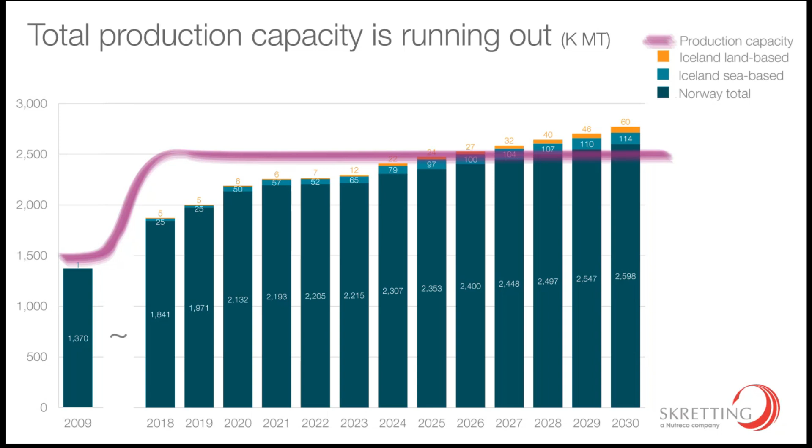So one thing is we need to secure production capacity, but we also need to secure raw materials. Where are we going to get these raw materials from? If Icelandic aquaculture is going to grow, what are you going to feed the fish with?

As a company, we are this year 125 years old, and we would like to see our company survive the next 100 years. But we'd also like to see our suppliers and our customers become such an old company too. For us, sustainability means securing the things we have scarcity of, also in the future, so that we can continue to have them.

A thing we are really occupied with is marine resources. First of all, that's the best raw material that we have. Making fish feed could be quite simple - take white fish, just blend it, off you go.

But what we saw was that in the 1990s, when aquaculture in Norway started, the recipe we had mostly used wild fish - blue is wild fish. If we had to use the same recipe today, there wouldn't have been enough wild fish in the oceans to cover it. That's how much food we create.

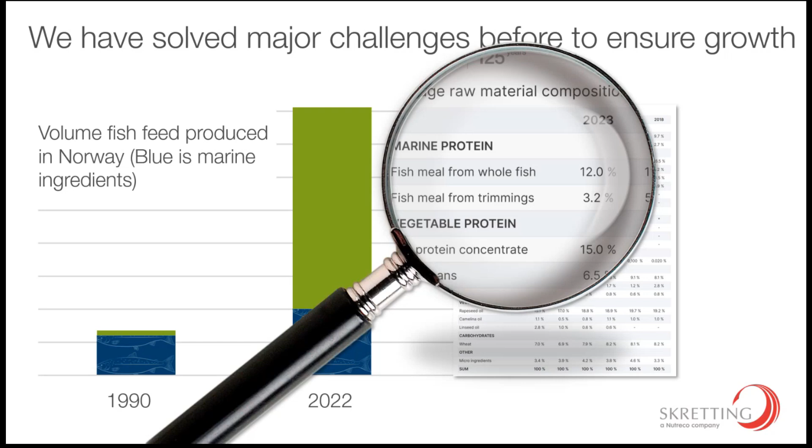When you look at it now, this is the amount of fish meal in our feed today: 12% from whole fish is fish meal, and half of that is blue whiting. We are willing to walk away if Norway, Iceland, Faroe Islands, the UK and EU cannot agree on this. And why is it so important?

Just take a look at what we can do with fish oil.

But the problem is wherever you go in Europe, if they're talking about overfishing, salmon is to be blamed. We have become the poster boy for overfishing—doesn't matter if it's true or not. Take a look at the German newspaper Spiegel: it says Chinese trawlers are fishing the coast of Africa empty for our Norwegian salmon.

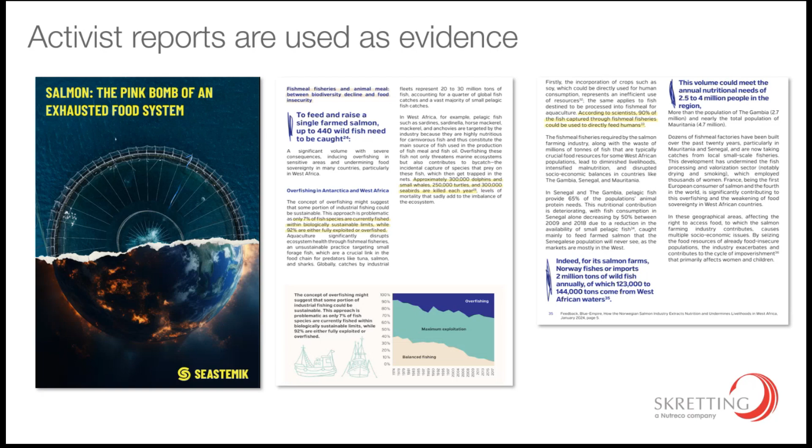And this was just last week. So this is the constant battle we are in, with consumers in Europe seeing this and thinking: will we eat salmon or not? Are we then contributing to overfishing of the oceans, the destruction of our ocean? That's the idea that consumers out there have.

Just quickly—a year ago, The Guardian reported one of the top chefs in London was not going to serve farmed salmon anymore. Why? Because we supposedly use so much antibiotics. We don't use antibiotics nearly as much as claimed. And also, overfishing, that's why. So you see these rumors, these myths, keep spreading.

And it carries on—New York Times, same thing, don't do it. Monterey Bay Aquarium, which isn't only an aquarium but the number one source in America for what kind of healthy seafood you can eat or not, says do not eat Norwegian salmon unless it's been certified.

This is also interesting: in Sweden, we've been accused of fishing the Baltic Sea empty of herring. They have this dish, surströmming—I'm not sure if you've eaten it, don't do it—but they don't have enough herring to sustain it, and we are being blamed that we are the ones doing it.

So restaurants in Stockholm have people going around handing out leaflets saying Norwegian salmon is ruining our traditional food. I think 1%—sorry, of all the herring fishery in the Baltic Sea, we used only 1% of it. But we are being blamed for it. That's why we only buy certified fish oil and fish meal.

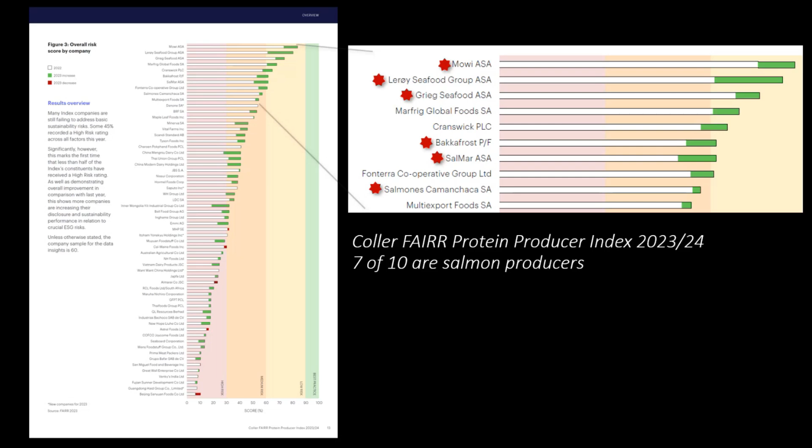Take a look at who's on top - it's North Atlantic salmon companies. And they would like to stay there. They're really proud of this. This is one of the main selling points. And it's not only greenhouse gas emissions, it's all these different areas where you have to score really, really high. Number 2 is biodiversity - again, are we sourcing in a way that we don't ruin nature? And why is this so important?

Well, is it the economy, stupid? It's the economy for the salmon companies. These words were Bill Clinton's, that's why I mention him here. But why is it so important? Green financing - you can get cheaper finance if you can show the financial institutes and banks that you are working in a good way on sustainability.

Mowi, the world's largest producer of salmon, says that within the next year, all their funding will be green. So they have to choose it. And DNB, the Norwegian bank, which is the biggest investment bank for salmon in the world, they are also really into this, and they will give you better financial terms if you can prove it.

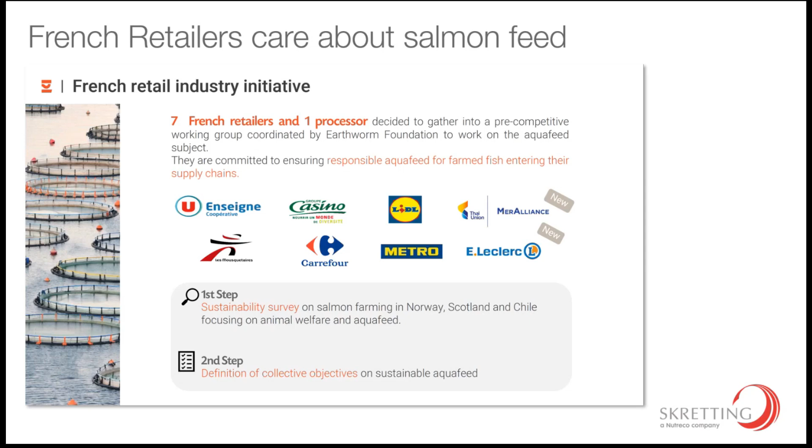Take a look at this - French retailers, the largest supermarkets in France, went together with an NGO and asked what should salmon feed be like. What they ended up with was: decrease use of fish meal and fish oil, use less, or at least make it sustainable. That's the push all over the place that we see.

So they're talking about this, and you have the EU taxonomy, which is the rules for how a European company can say they're green - what are the rules? There's one specific rule that relates to protection of water. That means a German concrete producer has to prove that company doesn't do any harm to the oceans. That's how important it is now for consumers all over Europe to protect the oceans.

In Norway, you don't find that demand for certifications. I talked to one of the buyers from one of the really large retailers in Norway, and he said we don't want our products to be labeled certified because it increases cost, and we don't need it because in Norway we trust the government to manage the oceans well. There's no need for it - we know that we do that.

Yeah, but what happens when word comes out about how we are doing with the coastal state negotiations on mackerel, herring, and blue whiting? Will the people of Norway still trust our government that we are doing well in managing it? So we are losing credibility here.

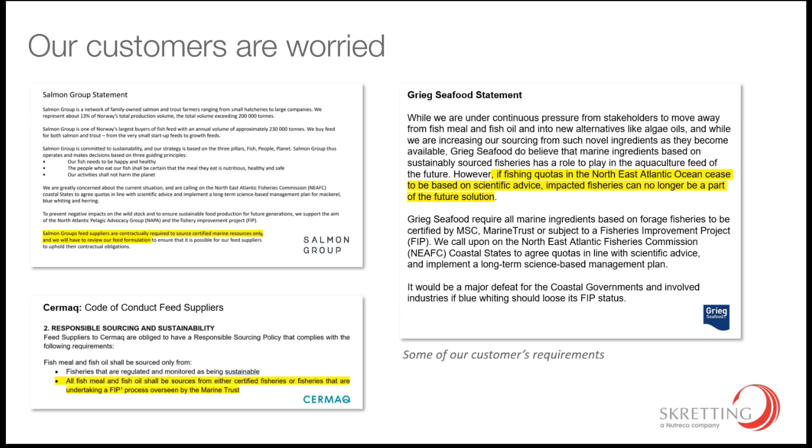So it is kind of critical now that we can prove that, no, this is the best raw material. You can trust us. We will do it in a sustainable way, and we will make sure that we are still going to be the best managers of the world.

But these things, the coastal states agreements - I'm not sure if you know this, but everyone agrees on the total quota of blue whiting, herring and mackerel. There might be disagreements, but at least we agree on it. Then everybody goes home and says, I'm going to need this much fish, I'm going to need that much fish, and they all overfish. We haven't seen a total agreement for lots and lots of years.

And this month, the fishery improvement project we had for blue whiting, which made it possible for us to buy it, ended. In the final hour, this fishery improvement project was extended by 2 more years. Marine Trust said, okay, we see now the awesome push, the market is pushing, we're going to give you 2 years. Because this is a political problem. It has to be solved with politics. The market cannot solve it, but we can push it.

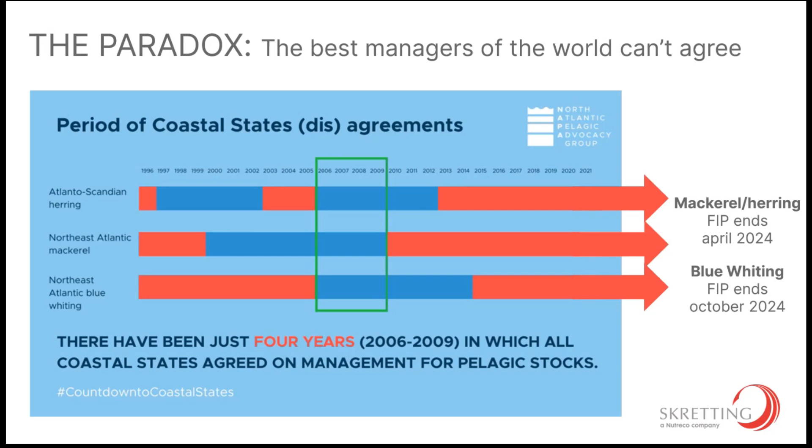I mean, the politicians are supposed to do what we want them to, right? We are the people here, and we are also the market. And the problem is, again, that in 2009 there was an agreement on how to share it, and that was the last time there was an agreement. And this is now how it is.

I know that Norway says we are the good guys because we don't fish more than we did. And the Faroes say we are such a small economy, we need this, that's why we need to fish more. And Iceland has their own arguments. Yes, everybody has excellent arguments. But it never gets solved when you just blame the neighbor and there's no movement in it. And that's where we need to push it.

And this is our Prime Minister. He is the co-chair of the high-level panel for a sustainable ocean economy. He says that Norway is an international leader in ocean management, and we must work together with our partners to translate ambitions into actions. And this is how you do it? I mean, there is so much good stuff, but it doesn't manifest itself in these negotiations.

Just another quick look at Norway. Norway has just started a mission, a society mission, which basically is a huge thing that Norway's society is going to do to create new jobs, new things. And the first mission is about fish feed, actually.

And what they are saying is that they would like to see all raw materials being sustainable, but also increase the production of Norwegian raw materials. Today, only 8% of the stuff we use is from Norway.

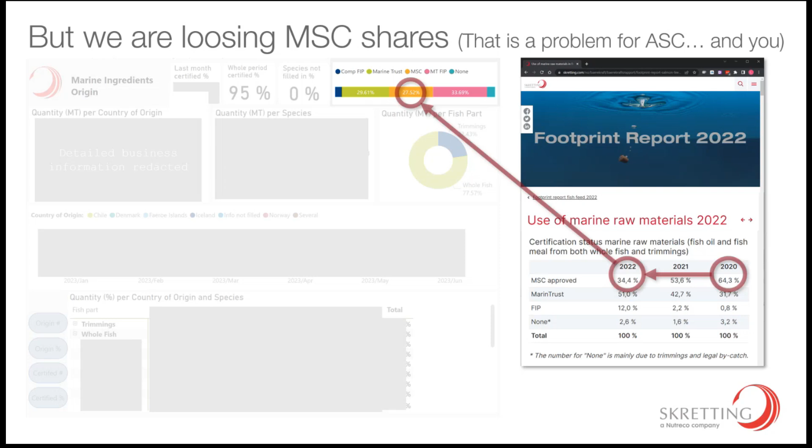But the thing is, there's not a chance you can get certified if you cannot agree with your neighbors on how much fish you can take out of the ocean. When everyone says, I'm going to have my piece of the cake, in the end the cake is not big enough. It is extremely difficult, yes, we know, but I'd like to look at Kennedy.

What they did in the US in the 1960s, he said they're going to put a man on the moon. What a mission. And he said we're not going to do it because it's easy, we're going to do it because it's hard. I think that's the same with the negotiations here. It's extremely hard, but I think we can do it.

We have agreed before, and we as an industry must let our politicians know that this is really important for us, because we would really like to have you as a supplier for us also in the future, because you just have such a fantastic product. So that's why I'm here today, to ask you all for help so that we can get the coastal states to agree.

And just a final thing, I've heard someone say that it's not a problem, because if you overfish one year, then the next year the scientific quotas will be adjusted, and there's so much fish anyway, so what's the problem? That's a completely different question. That's a question of how big the quotas are going to be. What we are talking about here is certified or not. That's black and white, folks.

Either you get the stamp or you don't get the stamp. And our customers need that stamp in order to sell their products. So please go ahead and argue about the quotas and what they're going to be, but at least agree upon the share you're going to take. That's what we need to do. So thanks.

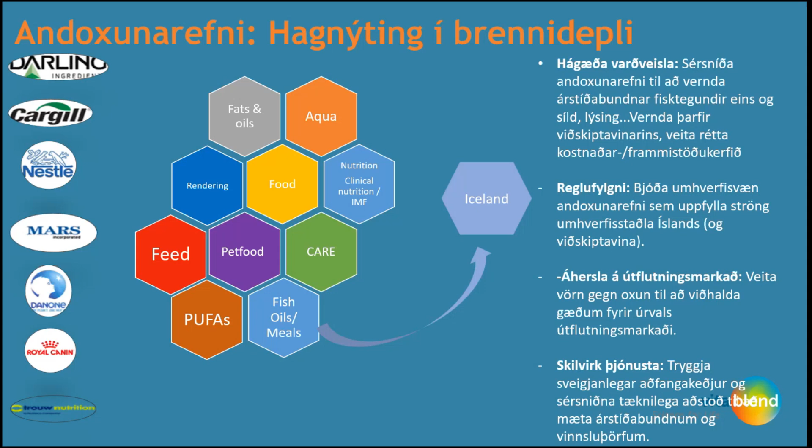Then, if we look at how we work today, this is the DNA and the essence of Vitablend, together with our partner N1. It's all about understanding your needs. So we use different types of active compounds. Most of you know tocopherols, rosemary extract, for instance, which are widely used in the industry today to protect your product.

So our job is to make sure that we understand what you are using, the matrix you are producing, and to provide you, using our laboratory, our technical team, with the right solutions at the right dosage. So we can make tailor-made antioxidants for your need, which suits your need, taking into account your matrix, your process, your targets, and of course, the regulatory environment.

This is what we do at Vitablend, together with our team, to really help you and to discuss with your technical team to find the right product. How do we do that?

Well, we have lots of equipment, lots of tools, and I'm sure some of you are also equipped with that. But this is basically the essence of what we do today. We talk about performance screening. And the devil is in the details.

Sometimes, again, as I said before, you might think, well, do I really need antioxidant? Or is the dosage I am applying in my process the right one? Because at the end of the day, for you, it's a cost.

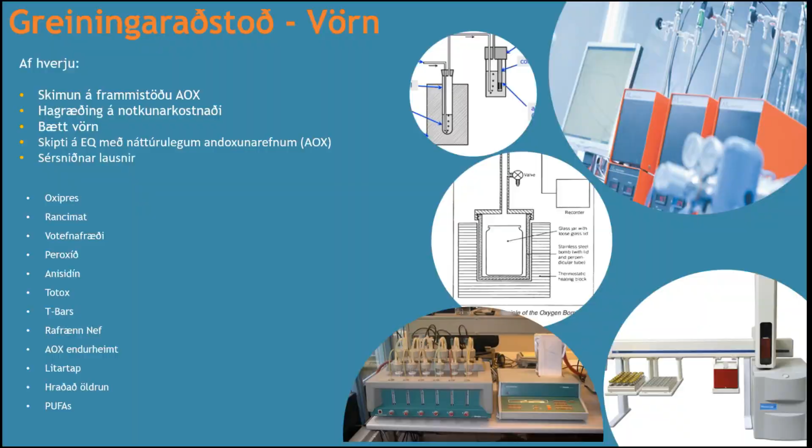So then you will need to adapt the solution and the antioxidants you are using. We took a couple of examples of matrices we've analyzed with different types of antioxidants Vitablend is producing, using different techniques, so it's based on science. We have a protocol, we set up the test and equipment, and then we get results on stability between the different antioxidants.

So it's very simple on paper, but again, experimentation - it's all about science. Comparing all these different formulations, in that case Atlantic herring, using natural or synthetic. You see that we have some nice solutions today to really maintain the quality and stability.

You see that we have some nice natural solutions based on rosemary extract, tocopherol, for instance. Also the more traditional antioxidants based on BHA, propionate, or citric acid, which might change in the future because there are lots of challenges today. BHA might be banned in the future, something we are monitoring very closely.

But you see here how we can deeply analyze the performance of different antioxidants in your product. That's something we can really do specifically for you, on your fish meal or oil you are producing. We've done this with the Atlantic herring example, or with another one, the blue whiting.

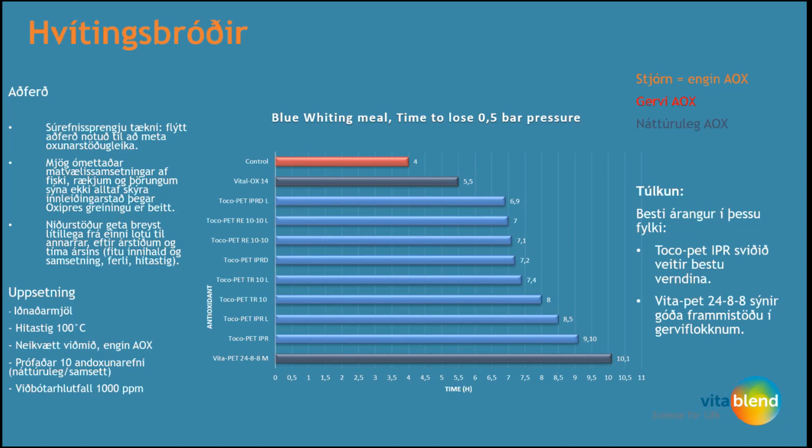So you see good performance of our Toco-PET IPR, for instance, which is based on tocopherol, rosemary extract, and lecithin, and different types of performance of the Toco-PET RE 10-10, which has another ratio of active compounds. This means that the different solutions will also perform differently in different types of matrix.

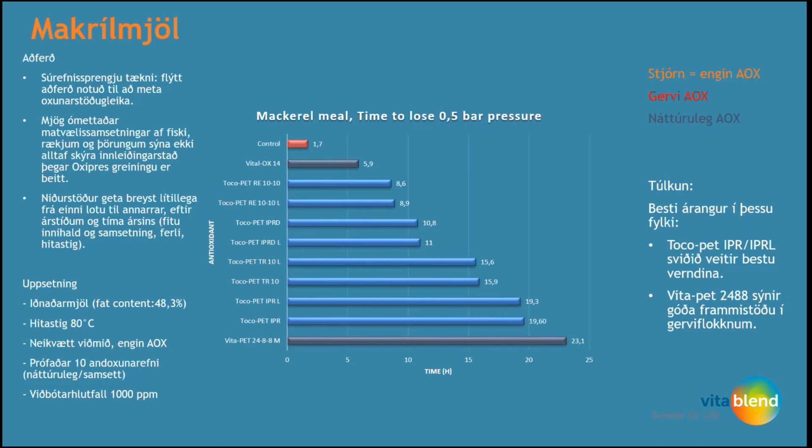That's very important to really focus on that. Depending on what you produce, you will need certainly another type of antioxidant at a different dosage. So if we summarize what we do today, and that's very important...

So it's all about understanding what you need. After 10 years being on supplying you together with our partner N1, we've been able to select some nice antioxidant systems, like the Toco-PET family, for instance, or the TR10. They have been proven very efficient.

But nothing is really set in stone. Things are changing, and the profile of the fish you are fishing will change, the fat profile. So we will always need to monitor the performance of the antioxidant over time, also depending on what you are doing. That's something we want to pursue and develop with you — assessing, testing, monitoring, optimizing the functionality and the cost of the protection. That's something we want to do, and we want to keep doing it in Iceland with you.

The solution you need, we have it. It's just a matter of identifying exactly how to achieve that and how to test it and how to select it. What is also important — you might think, okay, that's great VitaBlend, but you do the test. Well, we can also do tests outside of VitaBlend using external laboratories. Then you are sure that the tests are neutral, and that's also important in some cases. We can do blind tests to compare VitaBlend with any other type of antioxidant system to make sure you are convinced about the performance of our product and our systems.

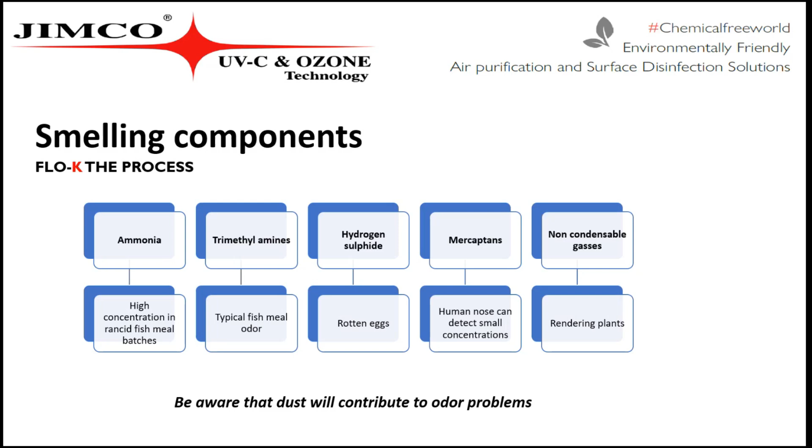Amines, they smell bad, very bad, much worse than hydrogen sulfide actually. Amines come from fish meal, fish oil, fish production. That is a really bad one, and the non-condensable gases too.

Now, the solutions for your productions - it is not really a chimney, because a chimney is just a dilution. And in America, they say dilution is the solution, but we don't do that. We need to do something about it. We need to destruct our odors, and a bio or chemical scrubber could be one of the solutions. It's not the best solution, I have to say that.

You will see when you start it up, you have fresh water in the system, you can have up to 50% of reduction, but after maybe 1 or 2 weeks, it is reduced to 30% or less. The water will start to have smell, to have odors inside. Now you are adding odor into your exhaust there. That's not good. Then we have biofilter.

Biofilter is pretty good functioning if you feed it well. It's also not really a very big investment, unless the ground that you are using is very valuable, because it takes a lot of space. So if you are in a crowded area, like now we just had a Dutch guy on the stage - in Holland, they have not much space. In Denmark, we do not have a lot of space. It's not really a good idea to use a biofilter in that situation.

Then we have photooxidation. It is what I'm doing. We are working with photolytic oxidation. I will come back to the efficiency and how and why it is functioning later on.

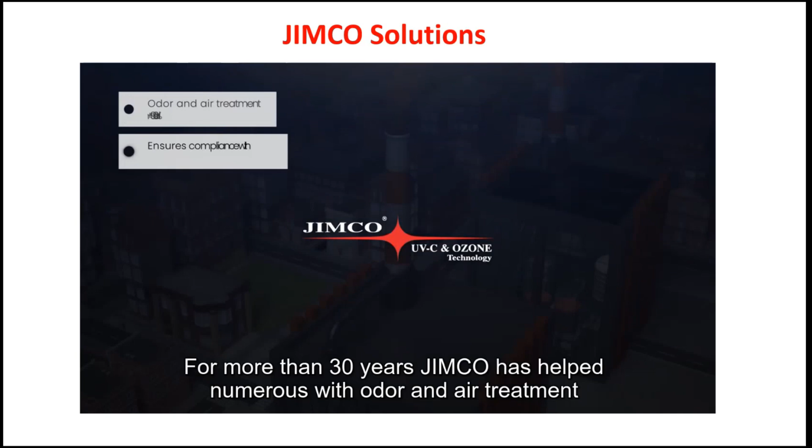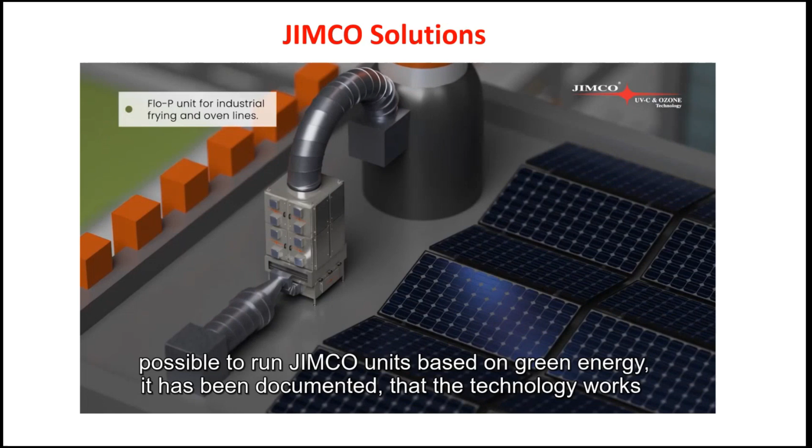For more than 30 years, JIMCO has helped numerous industries with odor and air treatment, with efficient utilization of existing space, custom-made based on requirements. It is even possible to run JIMCO units based on green energy. It has been documented that the technology works, and JIMCO has even won the EU Environmental Award in the Cleaner Technology category. JIMCO's technology is based on photolytic oxidation, which results in cold incineration of all organic material, giving results with up to 99% reduction. The process leaves no harmful residues.

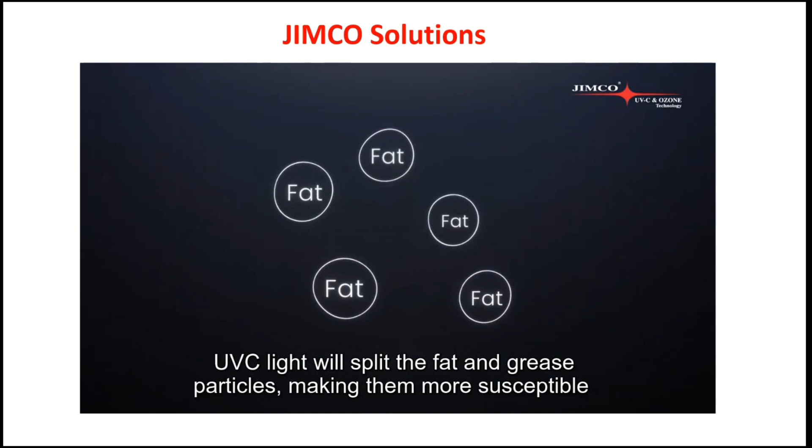UVC light will split the fat and grease particles, which makes them more susceptible to ozone. The ozone will oxidize with the fragmented fat and grease particles. Photolytic oxidation will reduce pollution to the surroundings dramatically.

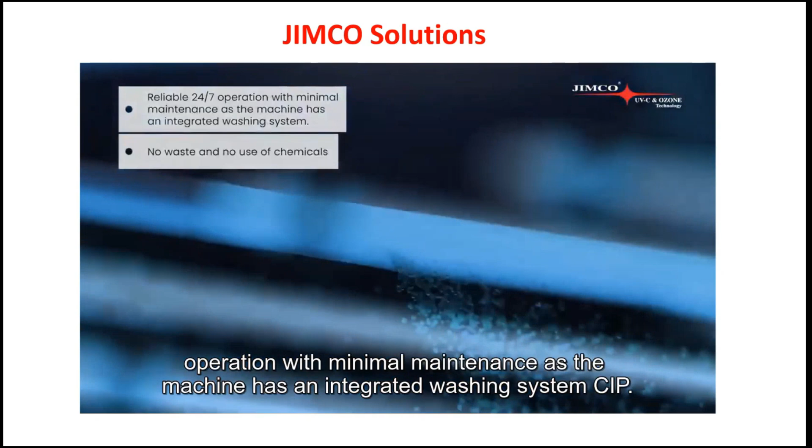Reliable 24/7 operation with minimal maintenance, as the machine has an integrated washing system, CIP. JIMCO's equipment can handle complex airflows from all sectors of the facility. When it comes to residual products, JIMCO is at the forefront of the fight against pollution. Our system ensures that no odors or harmful substances escape.

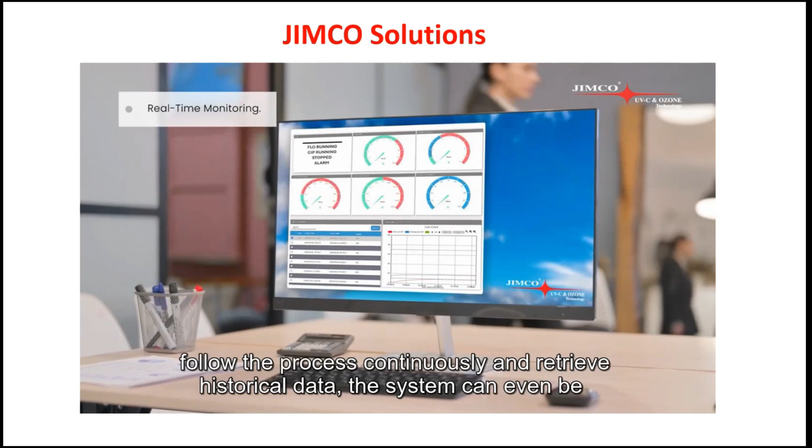With real-time monitoring from a dedicated cloud system, it is possible to follow the process continuously and retrieve historical data. The system can even be remotely monitored from any position worldwide. JIMCO, Sustainable Systems for a clean future.

Now, when we are doing our cloud system, we have had some questions from municipalities and government people. They want to follow the system, how it is running, is it serviced. Why they want that, especially in South America to be honest, is because they have had a lot of trouble with the neighbors or with the society around the factory, and they don't want to start up all that noise again. So they want to have direct access, but naturally it's you as the producer who is giving the access to the people if you want to.

If you are a company who has more companies in one concern, it's important that you can sit in your main office and follow that all your factories are running well, and follow, did they service the unit, did it wash last night, did it do this and that. You can follow everything, data log, and go back in history.

That is very important. Now, the system is very simply said, a cold burning process. What is happening is more or less the same as in a thermal oxidizer. It's just cold - we don't have any fossil things to burn the pollution here.

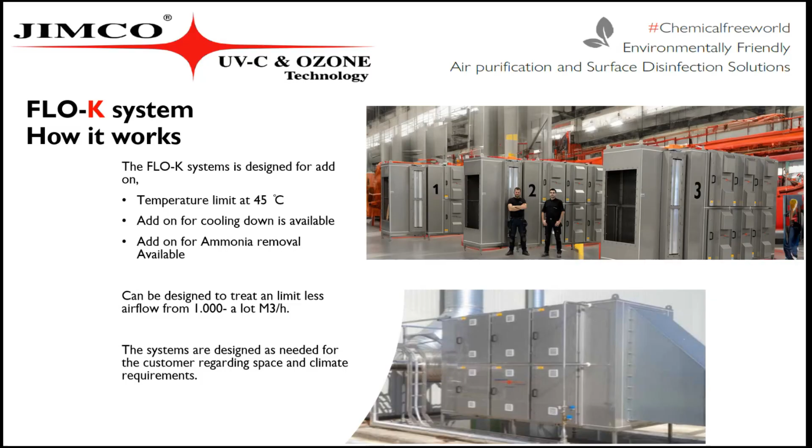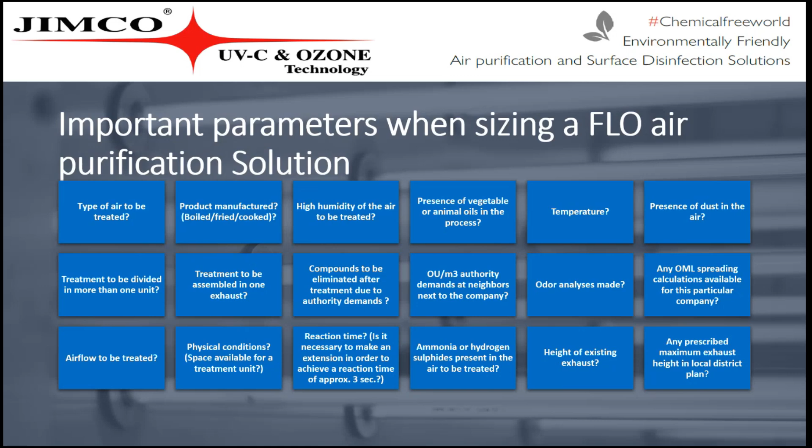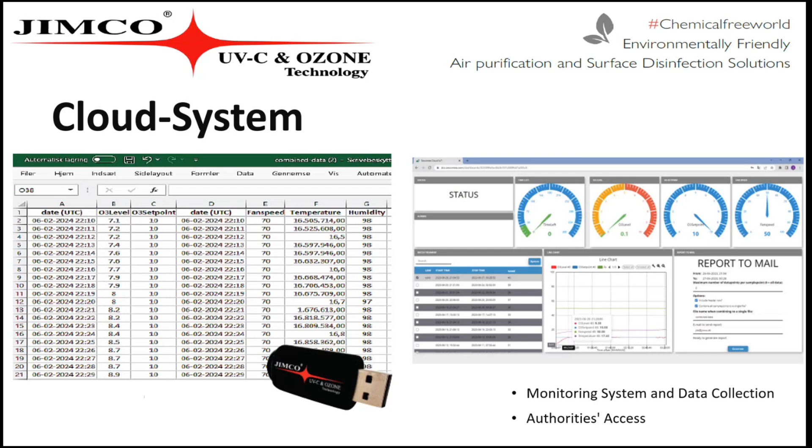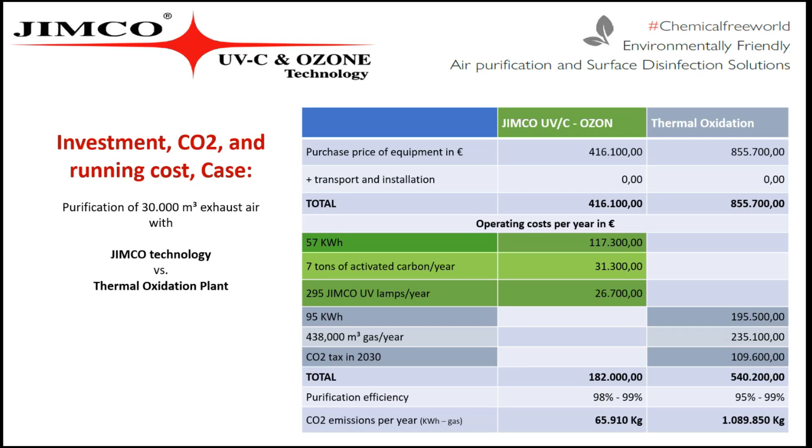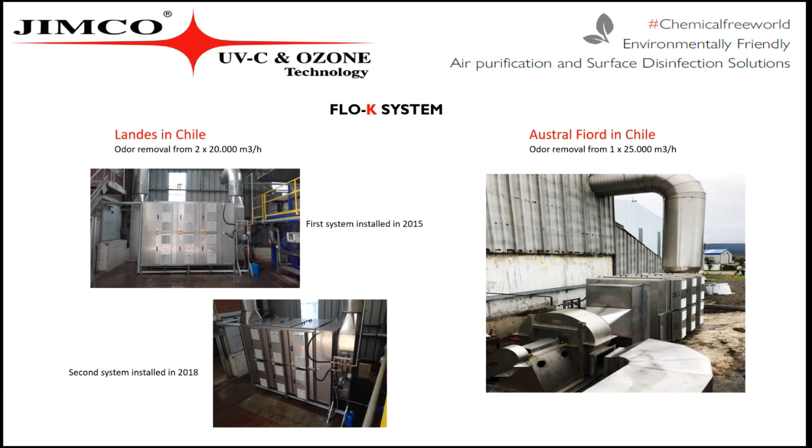And we have a movie again.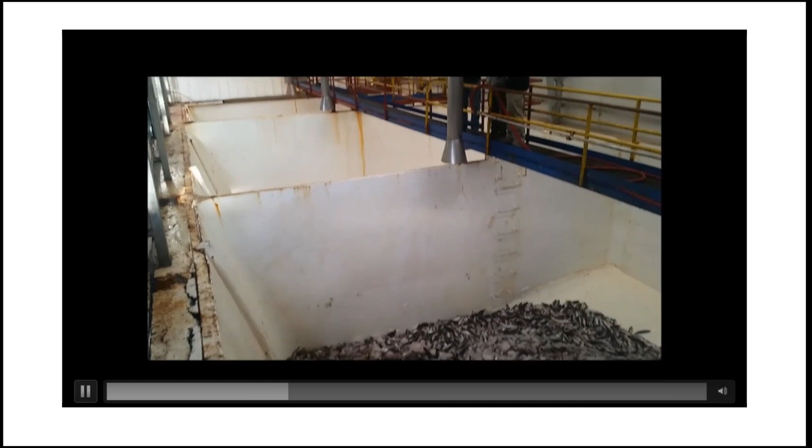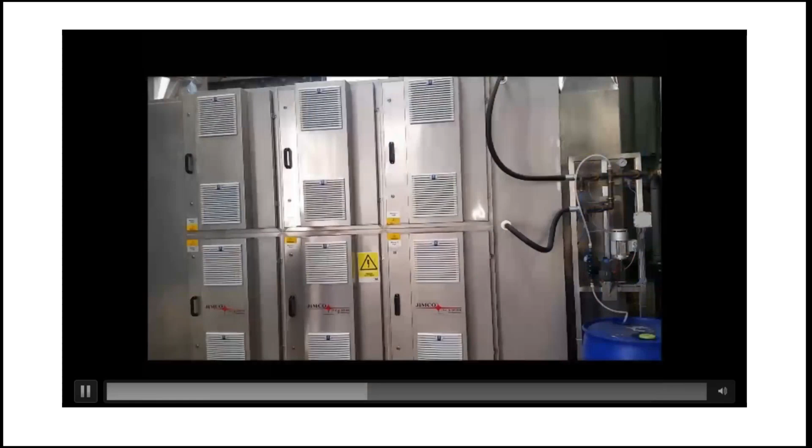As you can see, it's pretty compact. It can be placed inside and naturally also outside. Here we are treating around, I think it's around 25,000 cubic meters per hour. Here we also take the odors coming from the wastewater plant, from the DAF system.

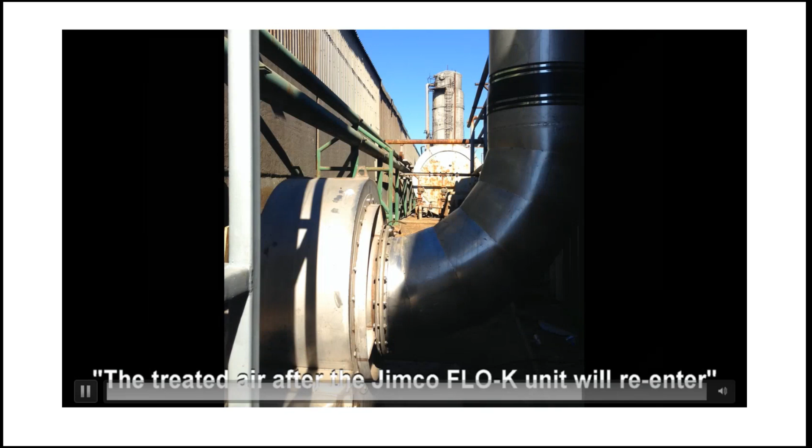That was what I had. Any questions?

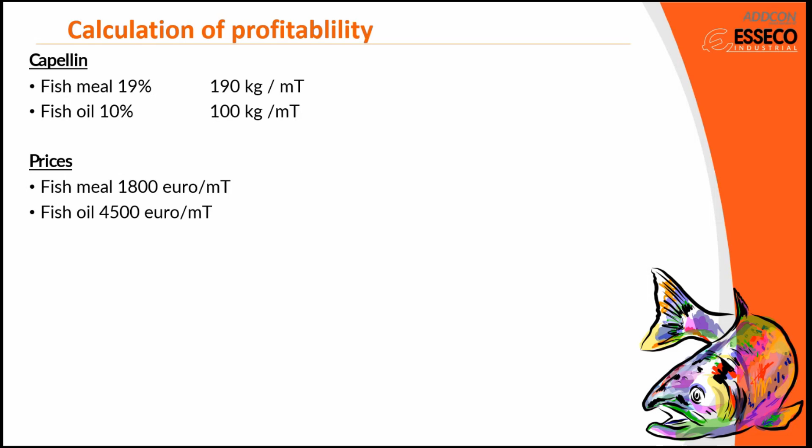These figures are from capelin: the yield I was told is 190 kilos of fish meal from 1 ton of capelin, and 100 kilos of oil from the same. The prices at that time were around 1,800 euros per ton for meal, and fish oil was 4,500 euros per ton. So of course, who wouldn't like to produce more oil to optimize the income? Total value in this calculation is 792 euros.

And of course, the product is not for free. I've used an example price of 2.8 euros per kilo, and the dosage, as shown on the previous slide, is 0.5 to 1 kilo per ton to be added to the material. So in total, you need to get a little bit more than 792 to cover the cost. Then, of course, I know you already use some other acid — this is not at all deducted from this calculation.

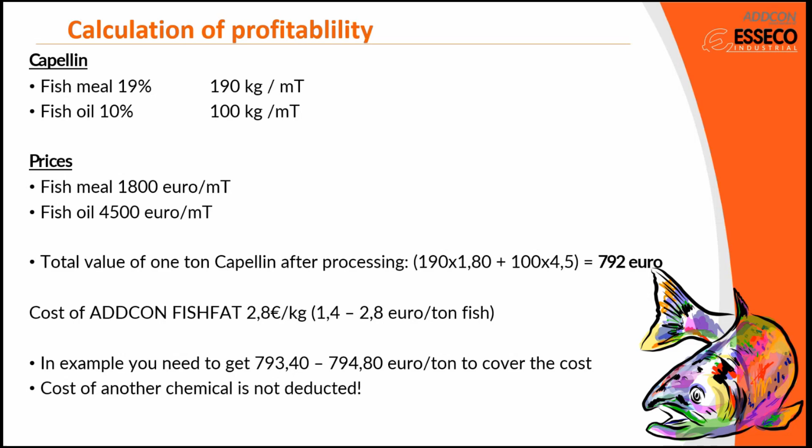So going to the profitability and the results: the content of the meal part is that there is still 10% of oil remaining in the meal. It's not always the same — it varies in different fish species — but there are always some leftovers of oil there. And what we want to do, and what we have found out, is that we can do something about this.

We know there is still 19 kilos of oil remaining in the meal part.

What we have done are small scale tests, which are convincing us that we are on the right way. We have also done product for a big scale test, and we have delivered it to Síldarvinnslan, but unfortunately it's not yet tested. I've been told it will be done later this year, so after that we'll have a big scale experience to tell about.

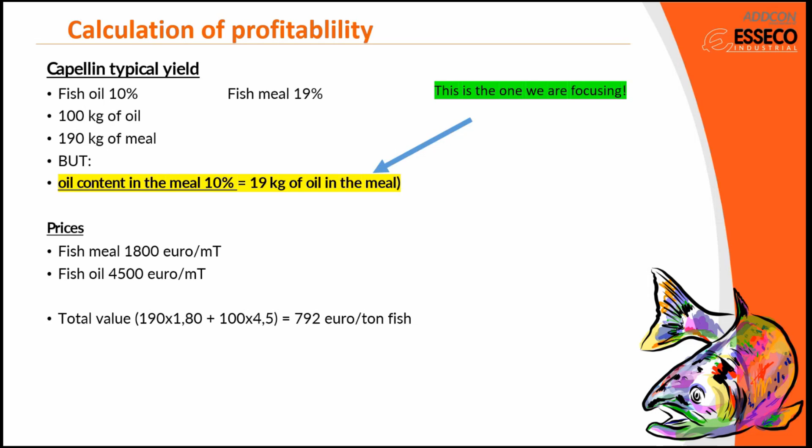The target is to increase oil quantity by squeezing out more from the remains in the meal. This is the situation, I made a very simple table. This is the situation before adding the product, which is supposed to reduce oil from the meal. It's realistic according to our trials to talk about 1%, that we are releasing more oil, so the remaining would be 9% instead of 10% in this example. This calculation means the value of meal is going down, but at the same time the value of oil yield is increasing.

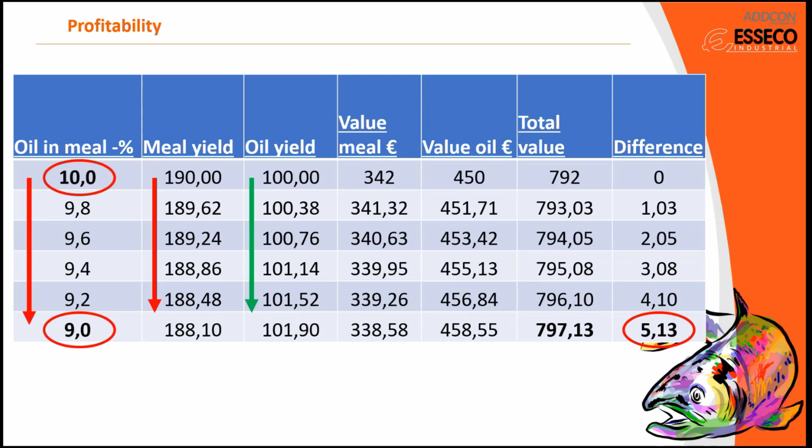With these prices, with 1% reduction, we can calculate €5 more per each ton of capelin, which doesn't all come to you, as I said, you need to invest a little bit there. But this shows that if you manage to squeeze out 0.6% from the original, then you have 1 kilo, or 1.1 kilo more oil, which is valued at €3. So the bigger earning is €3, and then the cost is covered.

So this looks very promising, and I hope it can lead to something very interesting.

I'm looking to see if there are questions or something coming already, but at least no one is sleeping, which is also very good. Thank you for that.

The product itself - I know you are very used to having acids in your production, so it's nothing really special, nothing really new. It's just a new combination of acids. This is built of propionic acid, potassium diformate, which is indeed quite a unique molecule produced in Norway at Addcon. It's used also in many other purposes in the feed industry, formic acid, and then some pure distilled fatty materials, which are very usual in the feed industry. So that's about this product.

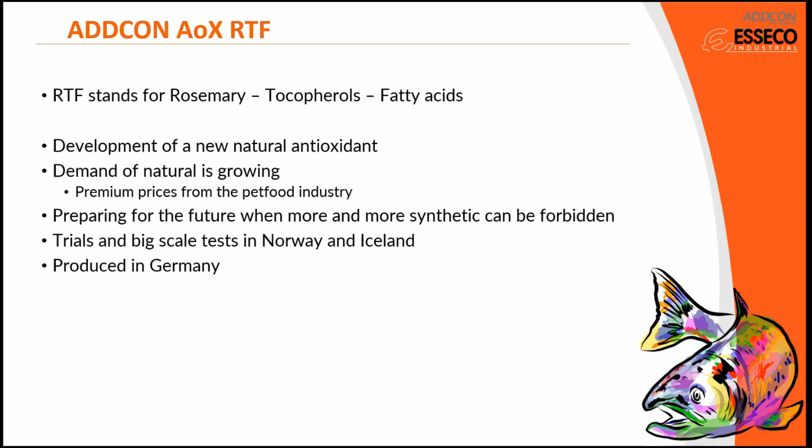We do now have test results from both Norway and Iceland. We have results from both oil and meal, and I will show you first something from the oil part.

Nordlaks is a Norwegian salmon company from Stokmarknes, Lofoten, and it's beside, wall to wall with Skretting, right? Yeah, and they are producing oil from their byproducts. Then when a batch or their tank is full, they analyze it and then pump it over to the neighbor. Is that fully correct? More or less. Good, happy about that, yes.

So the production manager there has done some trials. I will show you - I was hiding the product which he was comparing against, I call it positive control. So these are maybe easier, I had cut it into parts. This is now the positive control, and here he had put the parameters which they are analyzing, or at least which he felt was interesting: FFA, anisidine, peroxide, Totox, average numbers from 23, 24.

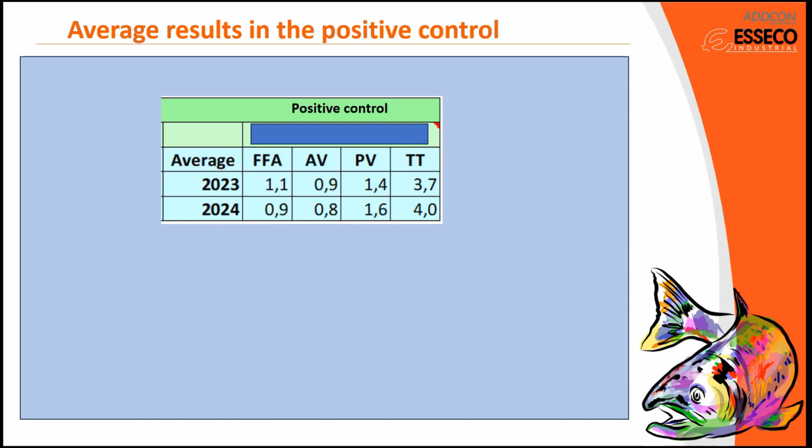Very good numbers. And then he used our product during the spring, mainly in April and May, with two different dosages, 300 ppm and 350 ppm, and gave us these numbers which they got from the analysis. So as said, I'm not the scientist, but for myself, this looks like our product is working at least as well as the previous product they used. So seems to be good.

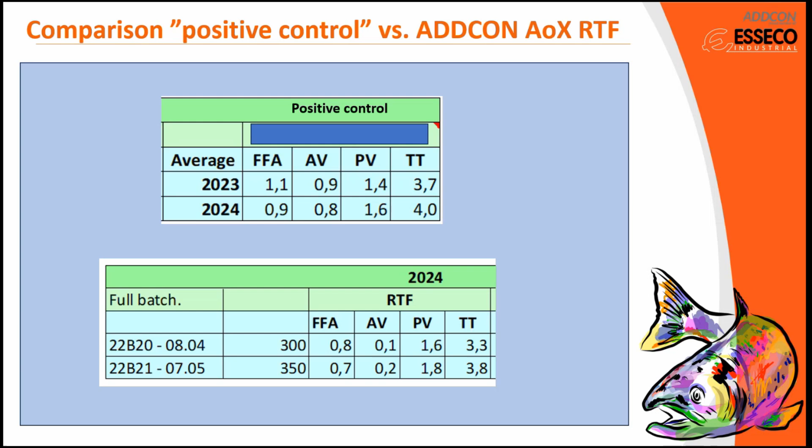We have also done some trials in Iceland, two of them. Sildarvinnslan sent samples in March of blue whiting. I think the catch and the meal was produced in January. In this case, we can call samples 1 and 2 a positive control - I don't know what that product was - and samples 3, 4, 5, and 6 are treated with our product.

There are small numerical differences, but both are delivering good results. To me it looks like both are working very well. So again, positive control is number 1 and 2, and our product is 3 to 6. This was the blue whiting from last winter.

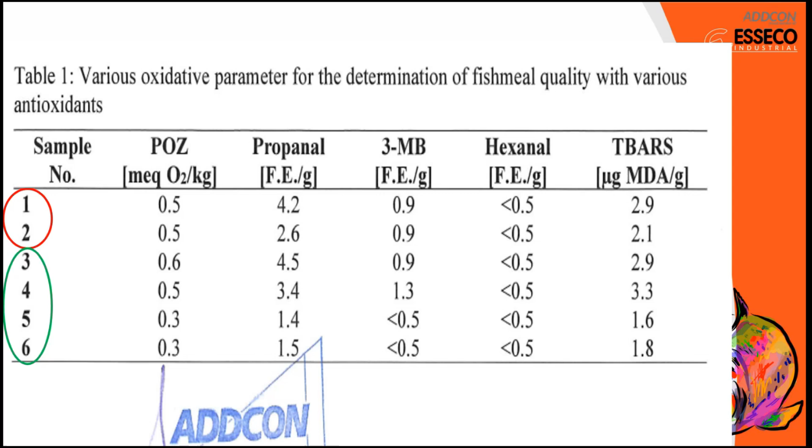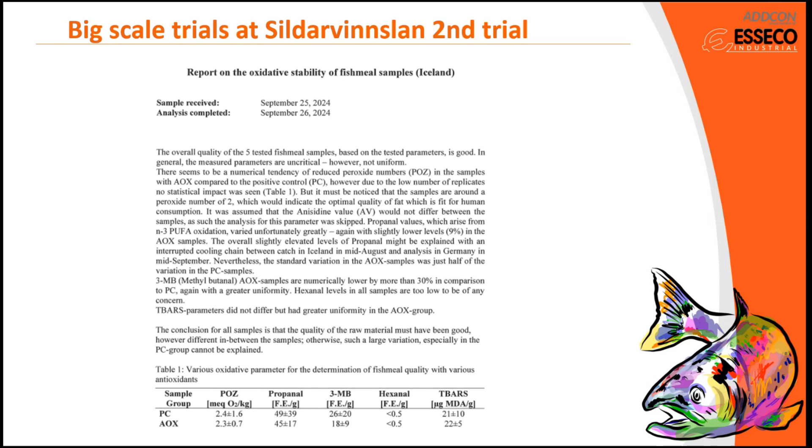Then the second trial, this was mackerel, and these results are very new. You can hopefully see the date - received September 25th, analysis completed September 26th. Let me show it in this way, cutting a bit from the table.

You can see quite a big variation between different samples, and with so few samples you really can't make any scientific conclusions from these. But again, I would say our product seems to deliver good results, and maybe in a more narrow variation. Of course, we don't know that much about the samples, but according to these results, I would say it looks like the product works at least as well as the competing product.

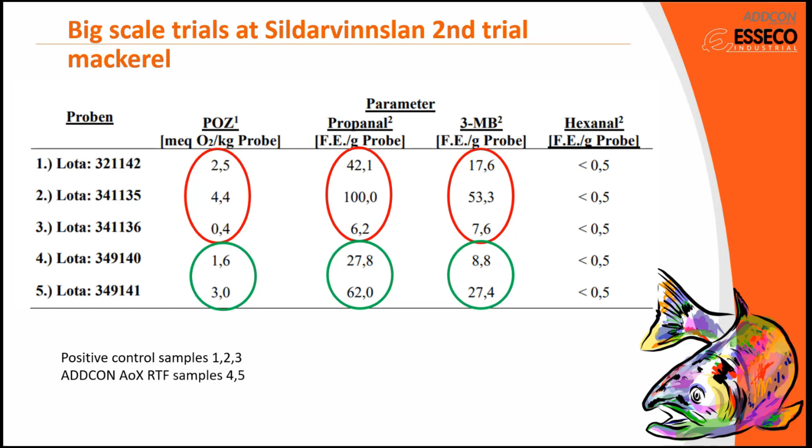Okay, looks like I was running too fast, but that was the content I had, and I would like to try to answer if you have questions. If not, I accept that as well. Thank you.

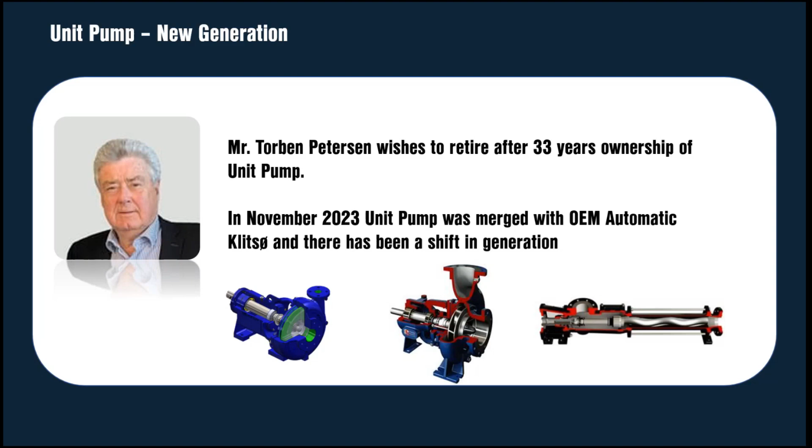The reason I'm here is that Mr. Torben Petersen, the owner of Unit Pump, decided after 33 years of ownership that it was time to retire. Torben turned 80 years old this summer, so it's fair to say he's done his duty in his work life. Since November last year, almost a year ago, Unit Pump was merged with OEM Automatic Klitsø, and during this last year we have made a shift in generation. Looking at the geographics, it was very lucky that Unit Pump and OEM were placed very close together, only 19 kilometers apart in a straight line. So it was fairly easy to move all the activities, employees, and warehouse from Kvistgaard, where Unit Pump was, down to Allerød, where we have our main office.

So our group now, focusing on pumps, our pump group, consists of the two girls on the right, former employees of Unit Pump. The first one, Dorte, had been in Unit Pump for 25 years and has extensive knowledge about all of our customers, the suppliers, the products and everything. So this is really valuable for us to have her joining the group as well. Linette as well, I think it's about 10 years she has been in Unit Pump, internal sales, mainly handling spare parts for pumps. Then we have Frederik, who is our sales engineer, currently the only one in Denmark, but we are starting the process to also hire a new colleague for him.

Torben is still there. Torben has been part of the group for the last year, as mentioned, slowly going down in time to prepare for his retirement. He's there for the rest of this month, and after that he is formally retired, but still available for us to call as a consultant, because he has many, many years of knowledge with the important thing, the customers and all the projects he has been working with. So this is valuable to us that we can call him whenever it might be needed. And lastly, myself as business area manager for the group.

Hello, everybody. You had a chance to get some coffee, and hopefully you're ready to listen now. My name is Peter, and I'm representing Danseal, a company that deals with pumps, sealing solutions, repair of pumps, couplings, laser alignments, and coatings. And I'm also very happy to be here again. I've been here before to show a little presentation, and I've been around Iceland last week to visit some of you, and that was really, I think, a really good experience to see you on site and to see most of your plants and facilities.

Beautiful country. So, saving the world, the planet, one pump at a time, that's a big title. And of course, I know we cannot do that by repairing a pump. But what I would like to focus on today are some of the experiences we have from the fish meal industry and proven purchase and maintenance strategies that can really make a difference, both money-wise, operational-wise, and environmental-wise. The company I represent, we sell equipment, but the guys that are working out in the field are all engineers, craftsmen. That means that we are capable of going out, installing pumps, seals, and being on site to help our customers. And this is the way that we like to do business, because we came from the same industry as most of you guys.

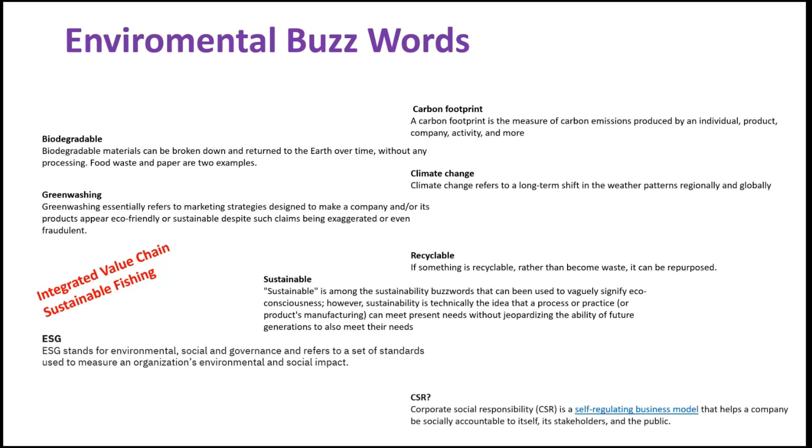I think we have to get used to these words because they're going to mean a lot more than we might want them to do. I think they're all good intentions to protect our environment and our world, but honestly, if they really have to be effective, we have to want to change our cultures. We have to really want to carry it out in real life.

So if we want to protect our environment, seen from a maintenance and equipment point of view, we have to focus on how we handle both new and existing equipment. That means when we buy new products, we have to focus on TCO, total cost of ownership, instead of just focusing on purchase price. We have to repair and reuse existing equipment on a much bigger scale than we do today, instead of always throwing it out and buying new stuff. That's a problem, because somebody here said, I'm a sales guy, I'm a little impatient, and I would like to sell again, because we are obligated to sell equipment, but we also have to focus on reuse and repair.

On the following pages, I would like to show some examples of what we have seen within the last 10 years are reliable products for pumps in your industries, fish meal industries, plus repaired and reused pumps.

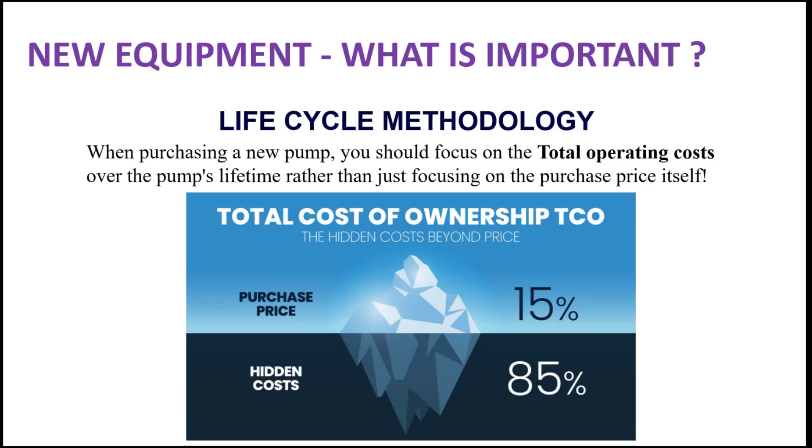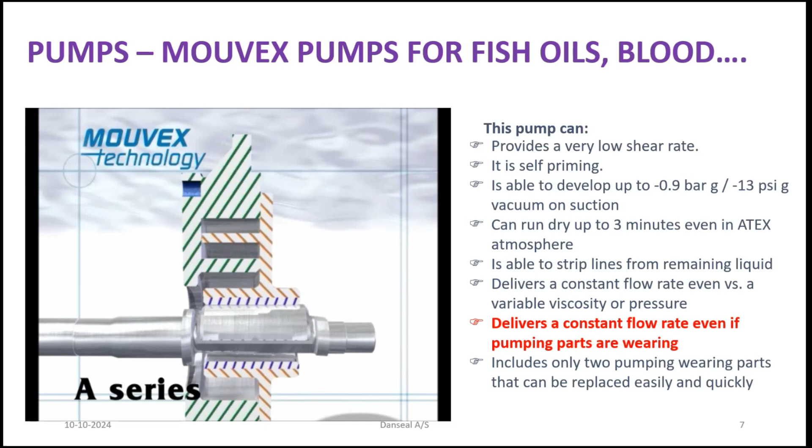One of the pumps that we've used a lot in industries like yours, for viscous products, fish oil, blood water, and stuff like that, is a Mouvex pump, which is an eccentric disc pump. It's actually quite simple, but it really does the job. It's a self-priming pump. It can run dry in ATEX applications. It can strip lines, meaning it can empty the suction pipe before we switch to different products. It delivers a constant flow even as the wear parts wear, as long as they're functioning, compared to, for instance, internal gear pumps that lose performance over time. Only 2 wear parts make up the pumping device, so it's really a simple pump.

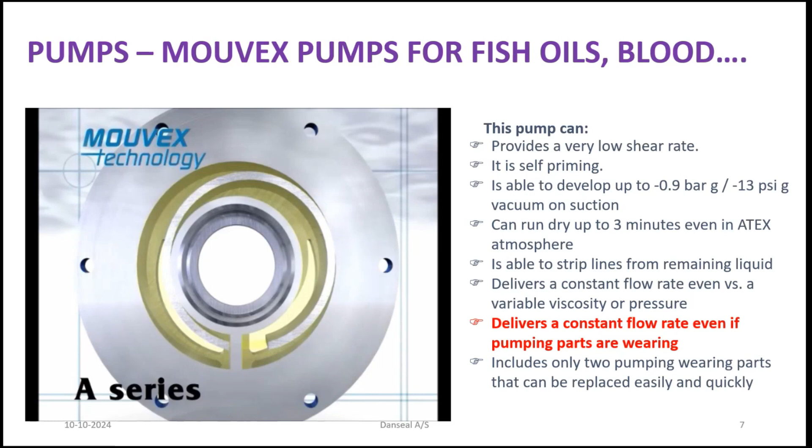Another example of a proven pump is the Blackmer System 1 pump, which is a heavy-duty centrifugal pump. It's like a small bulldog, really heavy, both in weight and in design. This pump is actually designed from what a mechanical seal sees, meaning it's designed with solid shafts, short overhang, low shaft deflection ratio, and oversized bearings. It has a 5-year warranty on the power end, lifetime warranty on the shaft, and 1-year warranty on the mechanical seal when using double seals, up to 1,000 cubic meters per hour.

And here we have some of the case stories from the fish meal industry as well, again from Iceland, Faroe Islands, and Denmark, going from seawater to processed water, covering all kinds of applications within the industry.

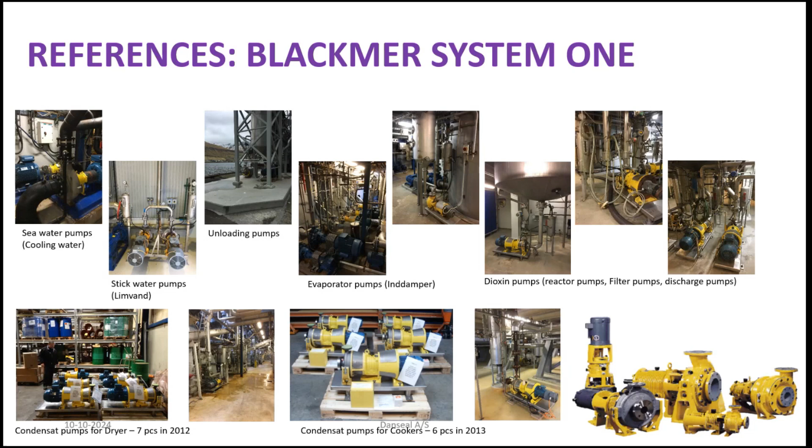Another pump is for fragile processes where you need shear-sensitive pumps. The Vaughan Triton pump is a shear-sensitive pump for transport of very delicate product, and can transport whole items like fish without damaging them. This pump can be used in applications where shear sensitivity is important, such as in combination with separators, where this feature is really important.

This manufacturer has a slogan that says, 'Do not sell a problem,' and they really live by this slogan. Based on this, they offer a try and buy. It means that you can actually have the pump out in your plant running without paying until it's accepted. So we make a deal about the time that you can test it. You get the pump out, you test it, and when it's satisfied, you pay for it.

No response to that?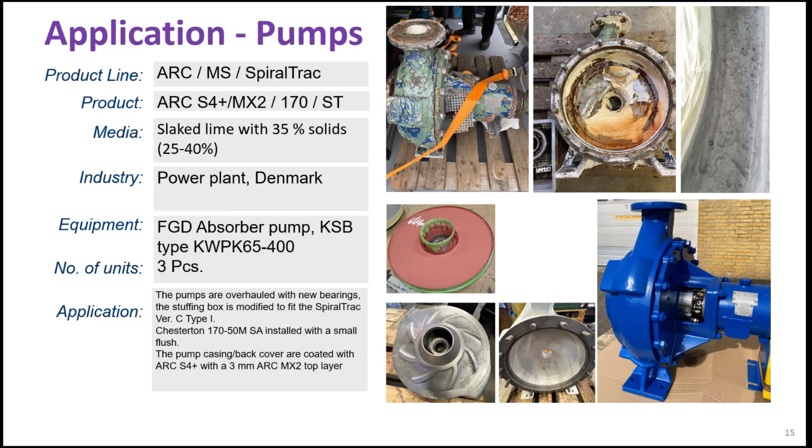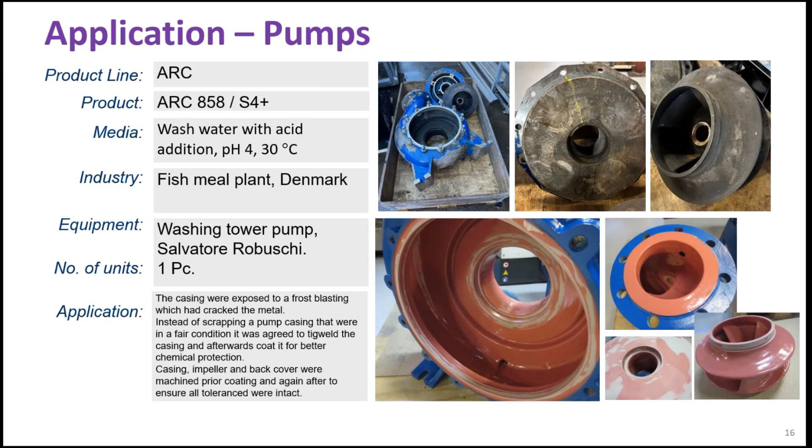Here is one from the fish meal industry. In this case, the customer had a crack in the pump because they forgot to drain the pump on an outside installation in temperatures below zero. So at the same time they did the welding of the pump, we got the chance to repair it and return it with a very nice surface. The impeller, a similar impeller, is actually in the back, so you can see the coatings and how it's applied and how it looks like. We make sure, of course, that the clearances are maintained in the pump so it has the same efficiency or even better than before.

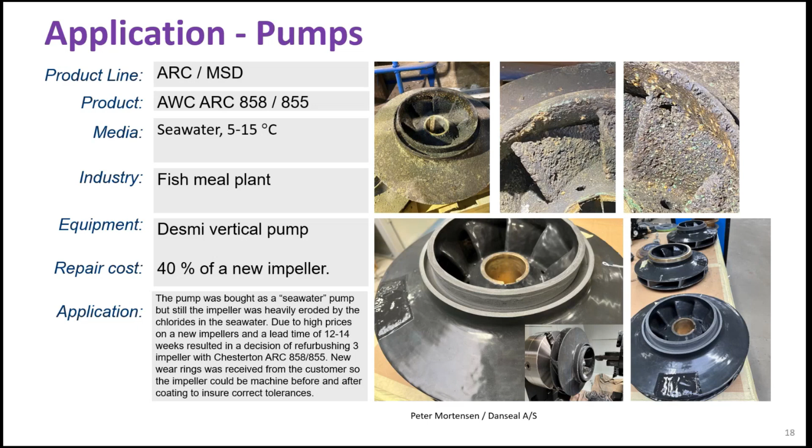In this case here is a seawater pump, or a seawater impeller, Desmi was the impeller. Delivery times of a new impeller, 12 to 14 weeks. We did these three impellers within 2 weeks at a price of 40% of a new impeller. This year we did the pumps that these impellers were installed in, again 30 to 35% for this one. Particularly, this was heavily corroded, but up and running in a very nice condition again.

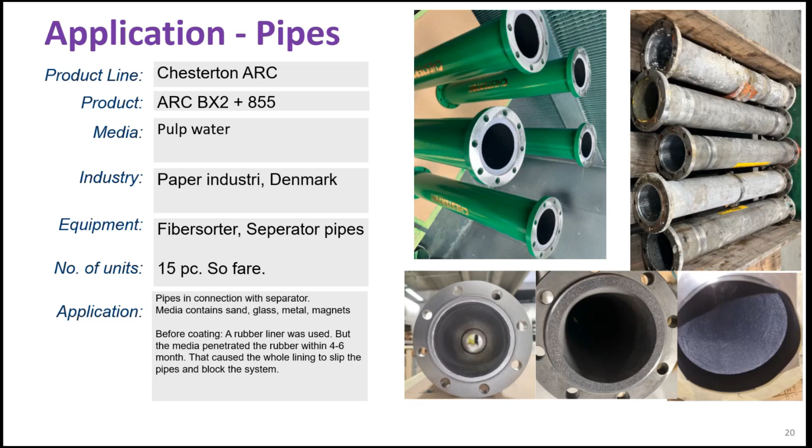Could also be pipes, tubes, anywhere where you have the need for chemical protection, for wear resistance, or maybe someday that you are going to pay as much for the electricity as we are, you will start focusing on energy savings as well, because it costs a lot of money. So enjoy it while it lasts.

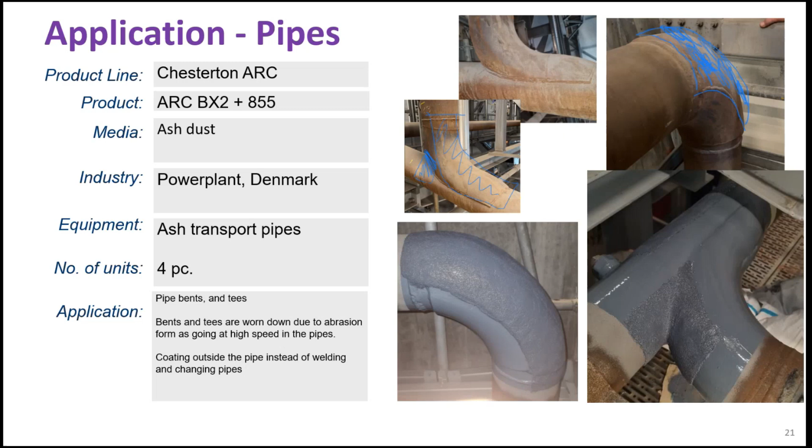These are power plants where they cannot take it apart, so they've actually done the coatings on the outside. That means that they know they are going to have a hole in the pipe, so they are prepared for the hole. They do the coatings on the outside then.

We supply mechanical seals up to 1 meter in diameter in standard sizes, from very small and simple ones to more advanced ones. We also do pumps, both PD pumps and centrifugal pumps, laser alignment equipment, coatings, gasket cutting in all sizes and shapes, couplings, and industrial lubrication and maintenance products.

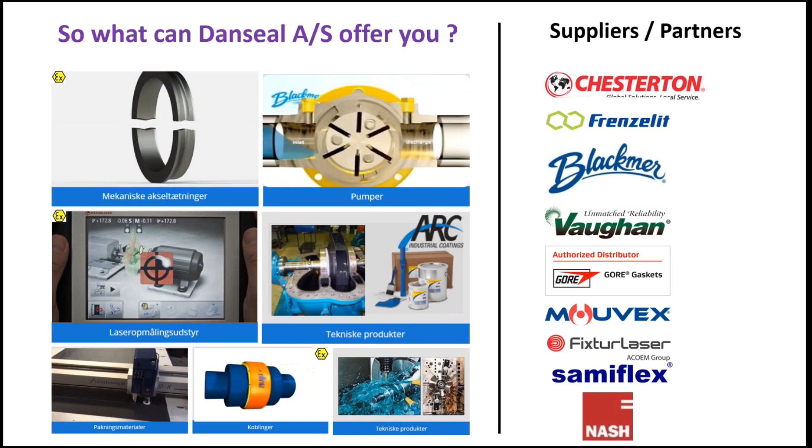On the right side, we have the manufacturers that we are distributors for. And we've been around for 50 years this year.

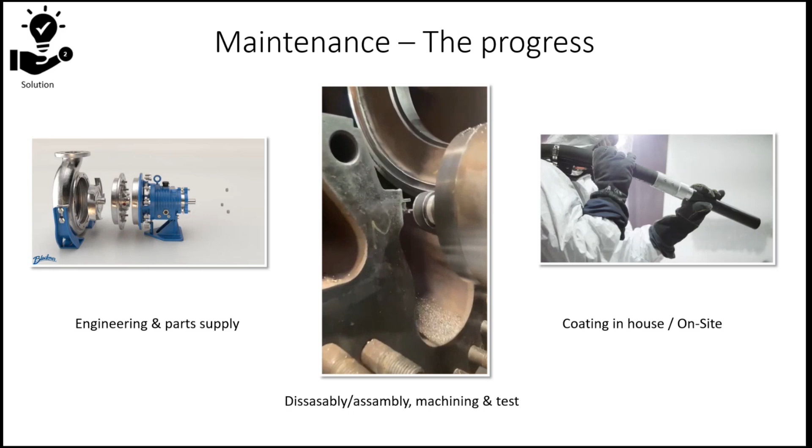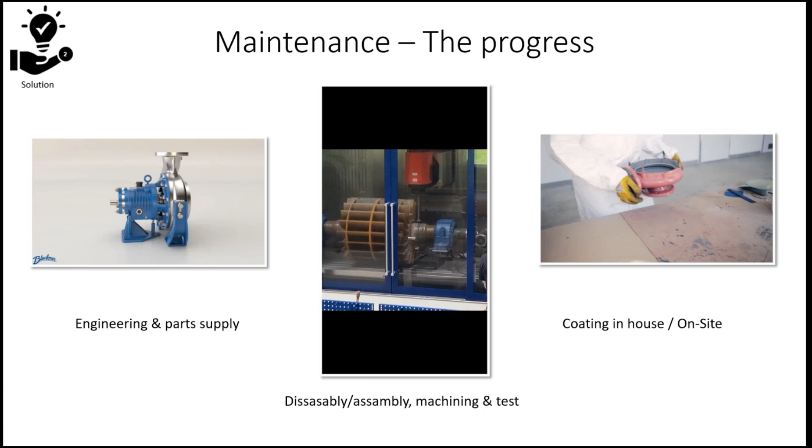Here is a view of some of our capabilities for repairing pumps. We have big machinery for any changes or modifications needed on pumps. On the right, you can see the preparation of surface finishes before coatings. We need to be sure we have the right profile of the metal, and that it is cleaned both for what we can see and what we cannot see.

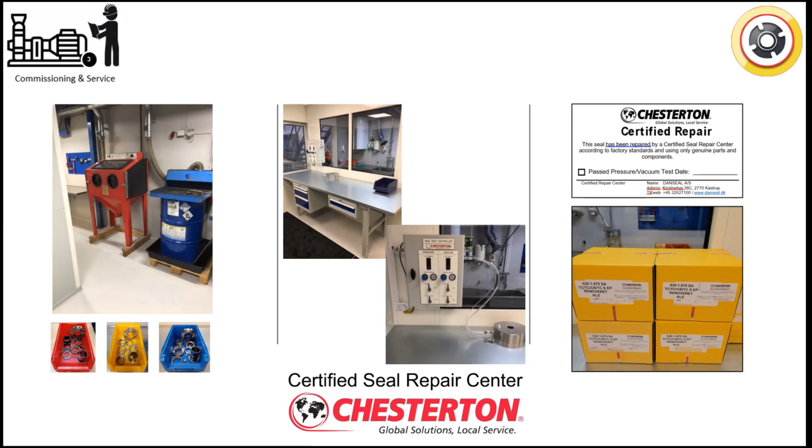When it comes to mechanical seals, we do the entire process: cleaning them, taking them apart, inspecting them, and reusing whatever we can. We relap the seal faces, box them, and put on a label that says Certified Seal Repair Center, offering the same warranty as a new seal. They're tested before leaving the premises, both for vacuum and pressure.

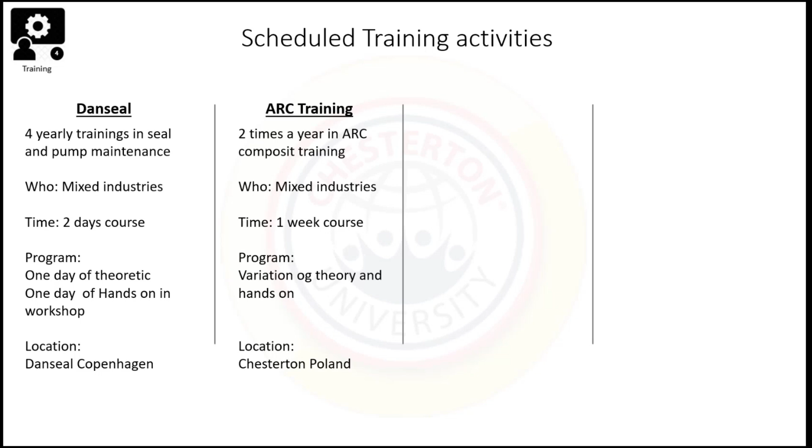As with all good products and processes, we know training is important. That's why we offer training internally in our company, 1 or 2 times per year. We offer training in coatings with Chesterton in Poland, where people do both theoretical and hands-on training. We also do one training every year in Boston with Chesterton for a week, and we can do on-site trainings as well. It's important that people have increased knowledge of the equipment they service.

So we can offer these things to you: handle complete pumps for repair and refurbishment, handle parts alone, handle the repair of your mechanical seal in our Certified Seal Repair Center, and we can be your sparring partner.

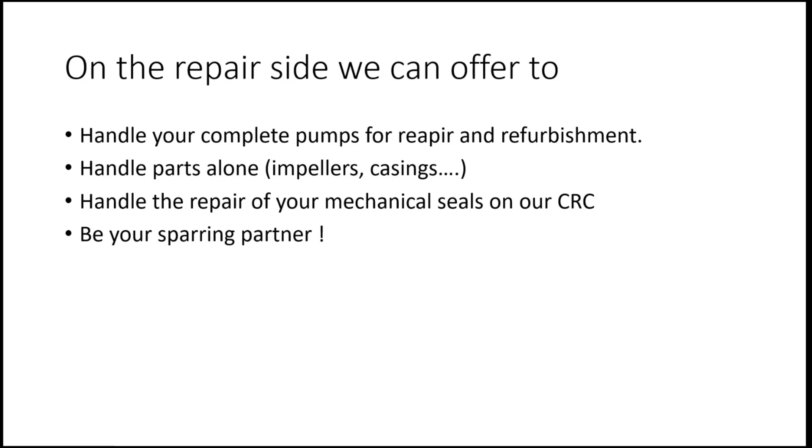A little about me: 27 years in this business, with a background as a marine engineer, working on board ships and in many applications.

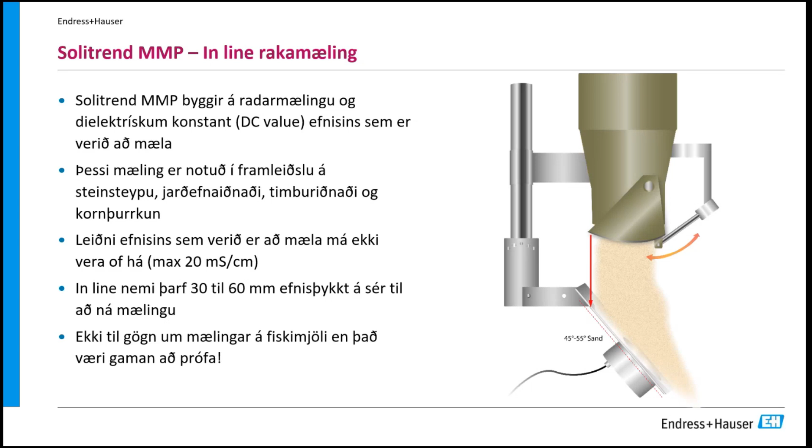Það var svo miklu meira. Þetta er svona mokklæra frá Endress+Hauser. Þeir segjast vera sérfræðingar í öllum mögulegum iðnaði, og alltaf til í að reyna að hjálpa ef það er eitthvað sem þeir vilja mæla. Og svo segja þeir: hvað geta þeir gert til að mæla og bæta framleiðsluna hjá okkur?